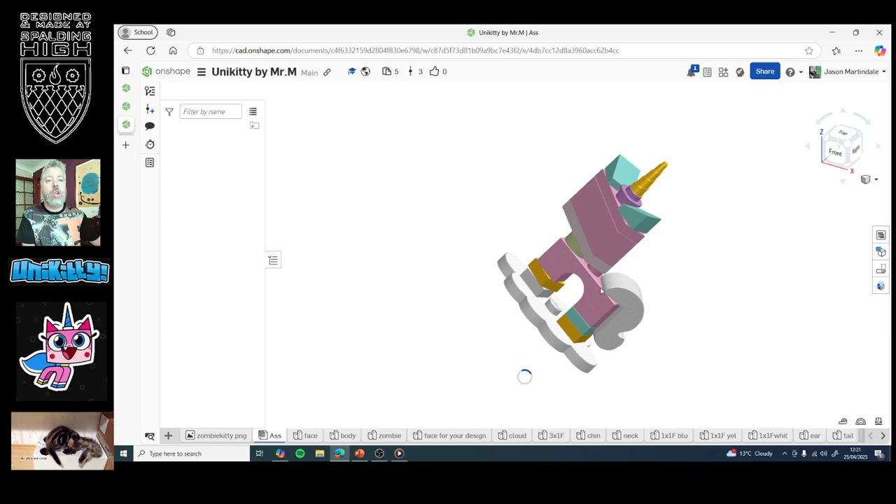But if you go up to the top where you've got these 3 lines and click on copy workspace, you probably won't have to do that bit there, and click on open. Then it'll give you a copy that you can work on, that you can change, that can be your own. You can see this is just taking a moment.

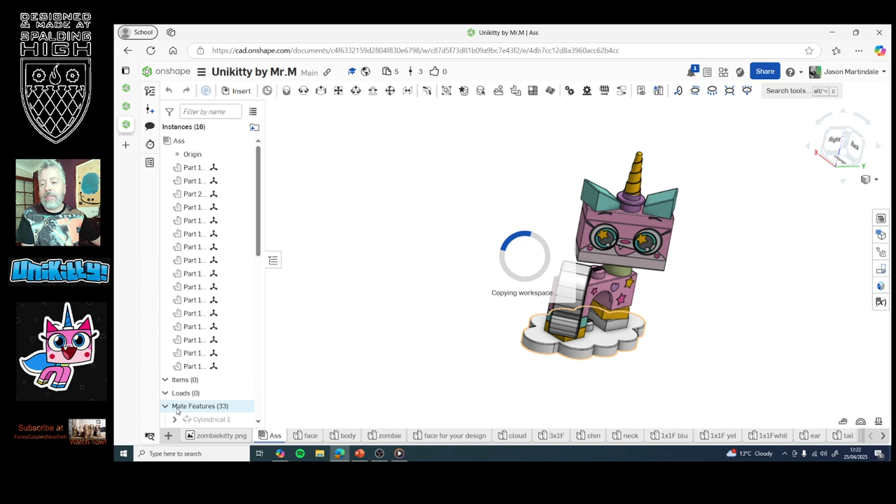You might like to have a look at the pictures of the video of cats down there playing in a box while that's going on.

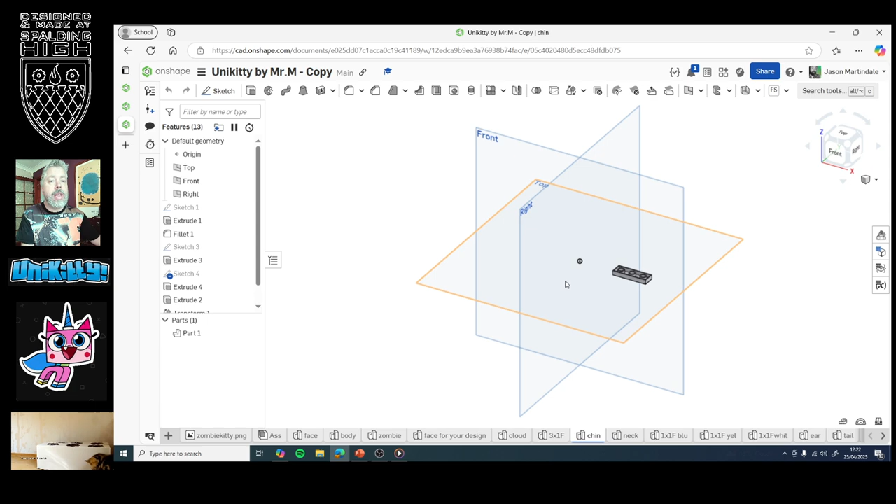Eventually we'll come through to here and we can view this. Along the bottom here you'll see that to do this I actually created all of the individual parts and then joined them together, and that would be, I guess, the next part, how we go about joining those together. What I want you to work on for now is this one that's the face for your design, the brick that would have Unikitty's face on it, and you're going to draw that on there. You might like to start by changing the colour of this.

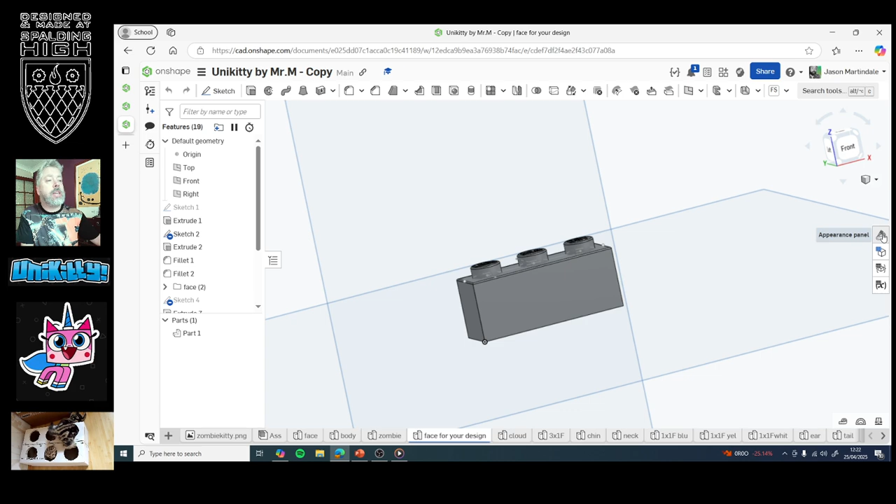Over on the right hand side where we've got the appearance panel, if you open that out and double click on there, you could change it to any other colour to begin with. That would all be a good way of working.

And then as per usual, we'd click on sketch, select the work plane, which is going to be this front work plane, and we would draw the different parts that we want to have on there. So maybe we've got a couple of eyes, and maybe we're going to have like a mouth that is involved. I should just double click to get that line, shouldn't I? Use a spline like that. So that is a sketch on the front.

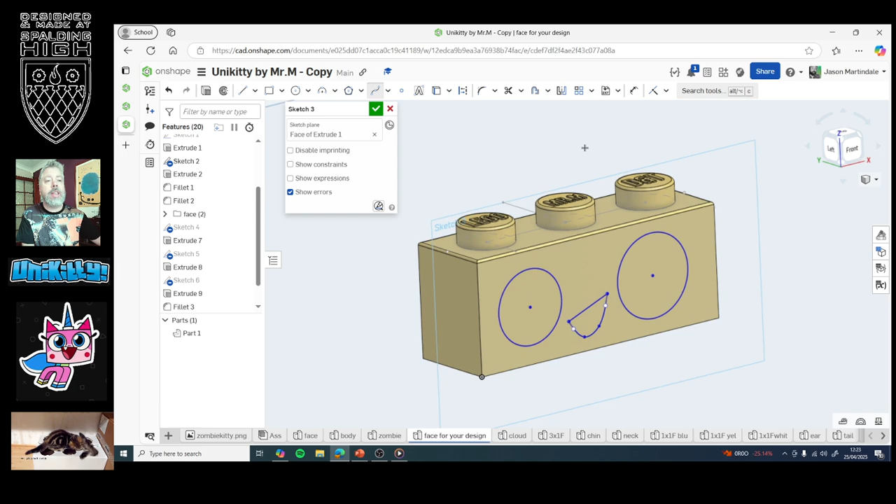Incidentally, if you were doing something that went up to the top of here, so let's say I was going to draw a, don't know what that is up there, just make sure that you do across the top here, complete the sketch so that it is an enclosed perimeter.

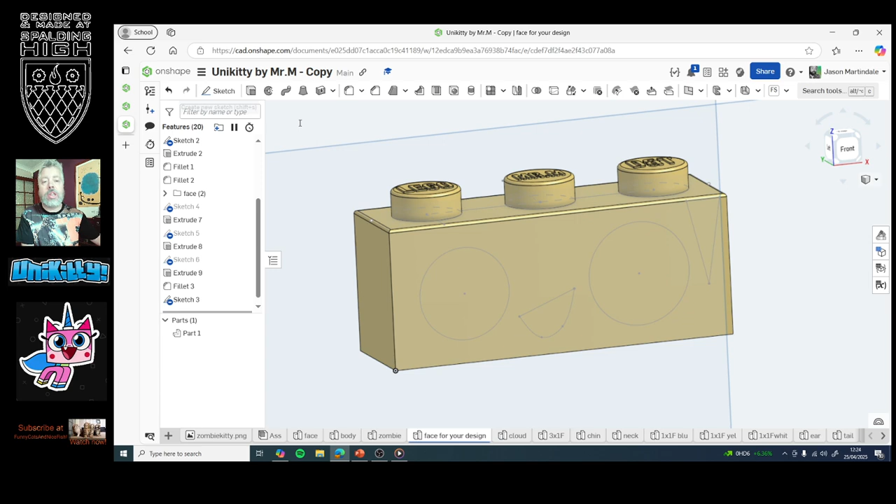What we can do then, in order to be able to make this a different colour, we do need to extrude that. Maybe not out that far, but if we take that into here, like so, it's almost like we've printed onto that. It does mean then that at our appearance panel we can go into add face appearances and select individual parts to be different colours and so on and so forth.

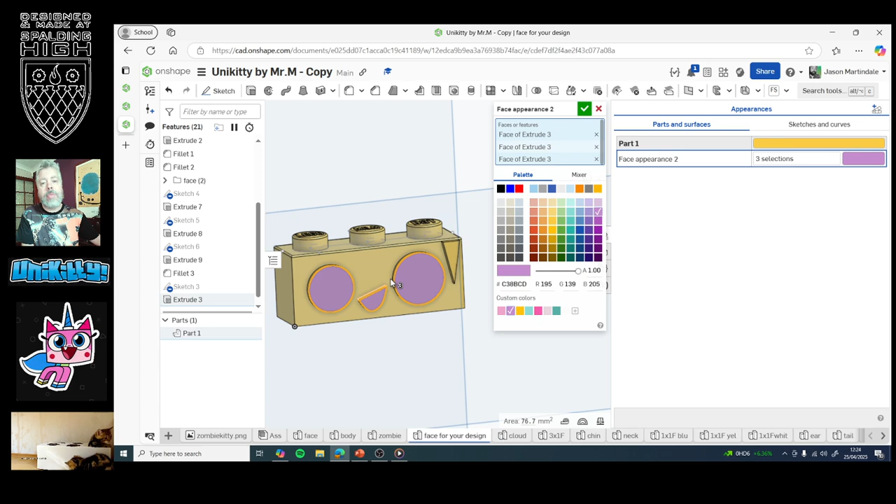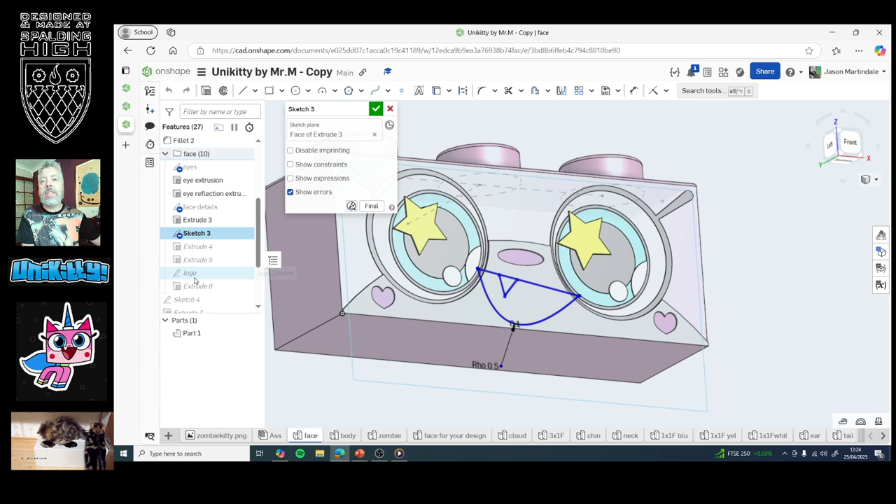To draw something more complex, what I've done, you can see, is I've just drawn quite a lot of sketching going on. So let's have a look - I've grouped them all together in this bit here. So I've got the eyes drawn as a sketch there. I've got the sketch, which is the mouth, and so on, and all of these different extrusions. So that is something that you can spend some time on.

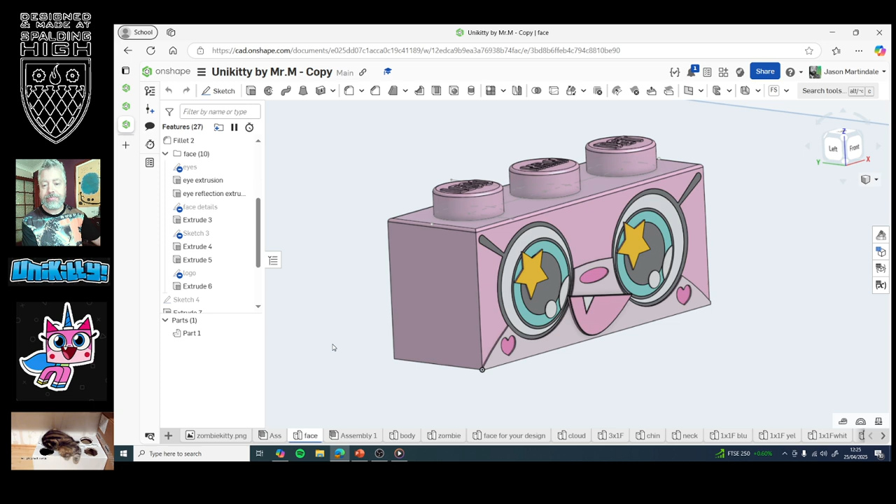Perhaps instead you would prefer to play with my parts and try and work out how you're going to join them together. To do that, we'll click down, insert a new tab down at the bottom here, plus, and we'll create what's called an assembly. If we click on insert, these are the different parts that I've drawn along the bottom here, and we can pick out any of those parts. So there's the face that I've just drawn, and I could take maybe the body and bring that in and put that there.

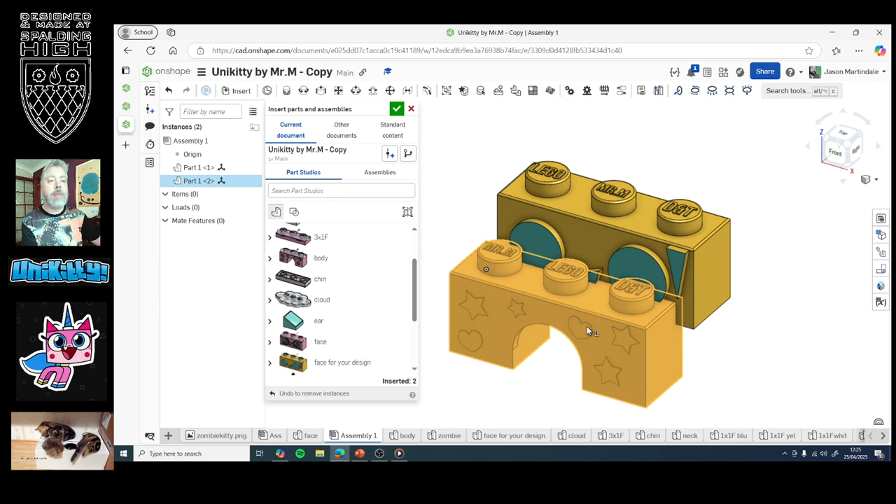For argument's sake, we will also bring in an ear. Just get rid of that up there. Restore - so there we are. So these are my different parts.

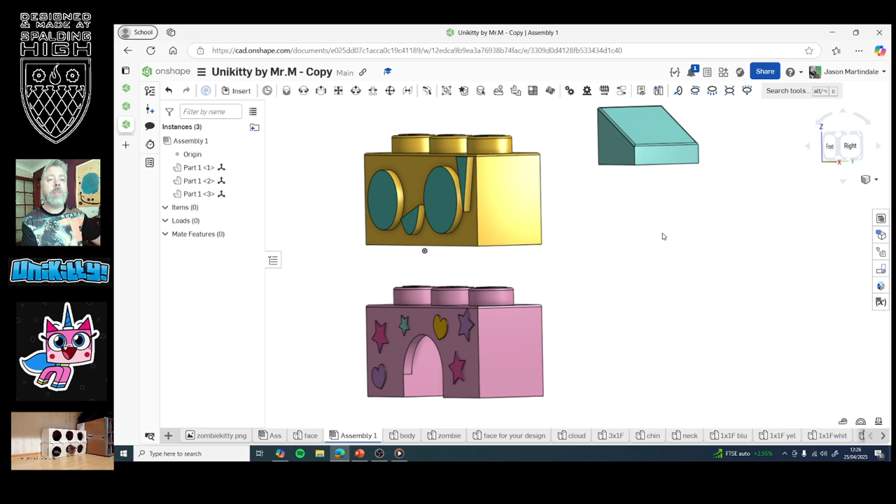Now it is possible just to click on one of these parts and try to move it around using this here. However, it's not very accurate and it's difficult to work because we're in a three-dimensional space. So you think you've got it in the right place, but it turns out to be too far forwards or too sideways and so on.

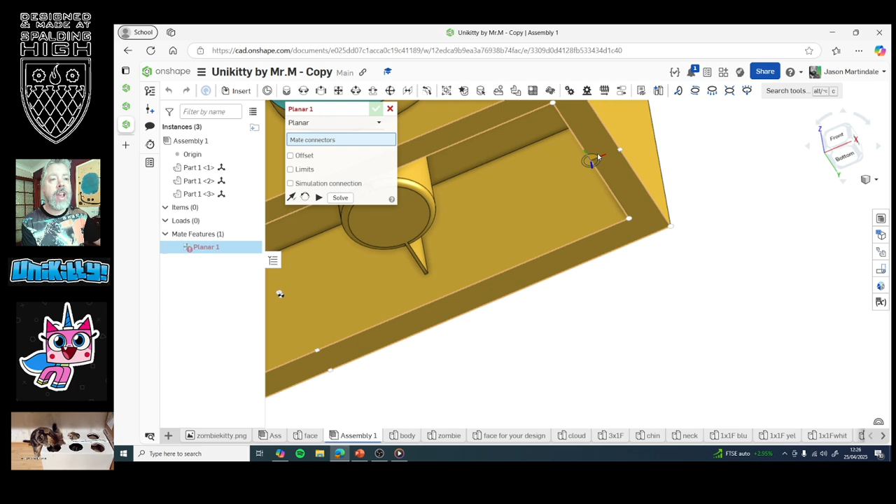What we can do is instead use this mating function up at the top here. If I click planar mate, it's asking me to select my connectors. If I try connecting maybe this face here, so if I click on there and then come out, that's still selected. You can see if I select this face here...

Now what it's done is it hasn't lined it up for me, because this computer's not clever enough to know what Lego is or even what these things are, but it has joined one on top of the other. So I can click tick there.

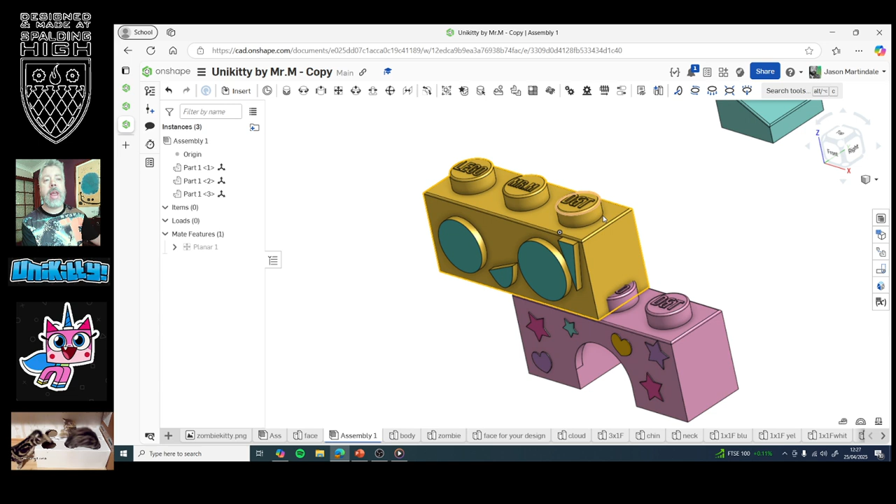And what that means as well now is that if I get rid of the planar function and click on this and try moving this, you can see it'll move that way and it'll move this way. If I try and move it this way, it takes the other one with it because they are in fact joined.

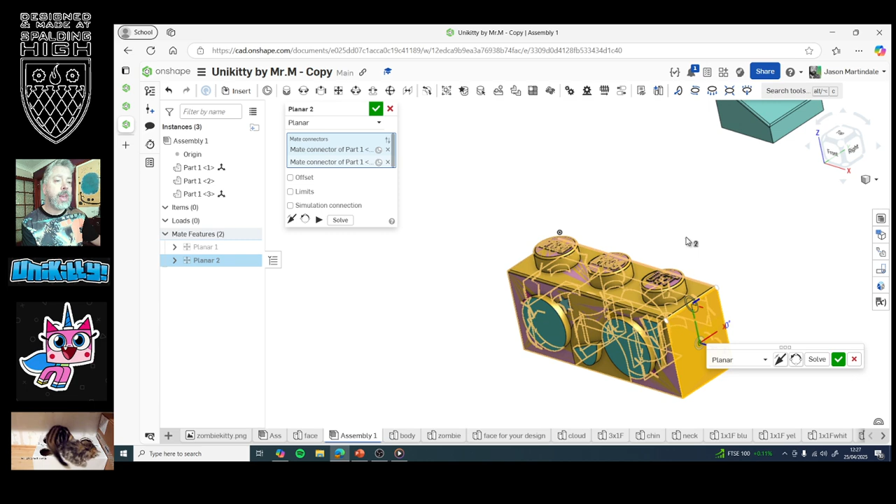So if I go back to planar mate and I select this as a mate connector, and I select this one as a mate connector, you can see - well, in actual fact it seems to have lost the first one. You will need to click on solve down here.

So click on solve and then it's like, okay, well I've worked that out. And it's put it there like that. So I can click tick there. Again, if I get rid of that, we can see now that those are joined, or at least nearly.

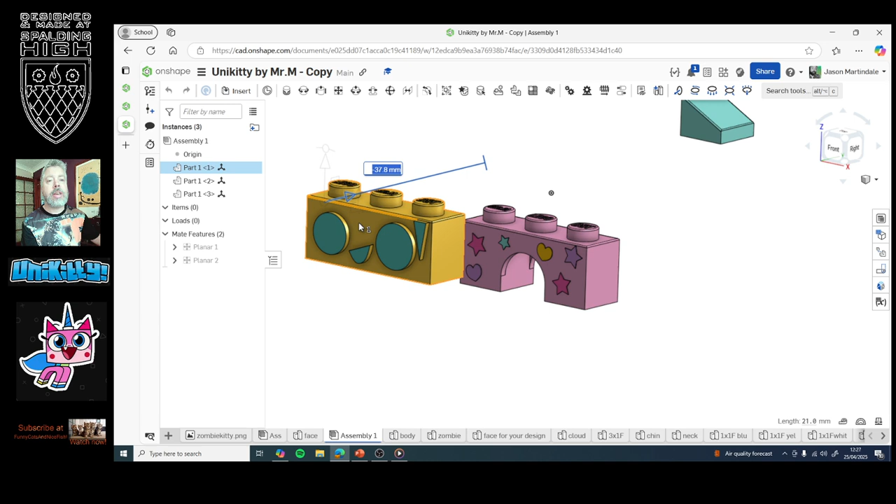You can see if I select this, if I pull this now, it'll pull that way. If I pull this way, it'll go that way. If I pull it this way now, it's still sliding off. So you could mate those together.

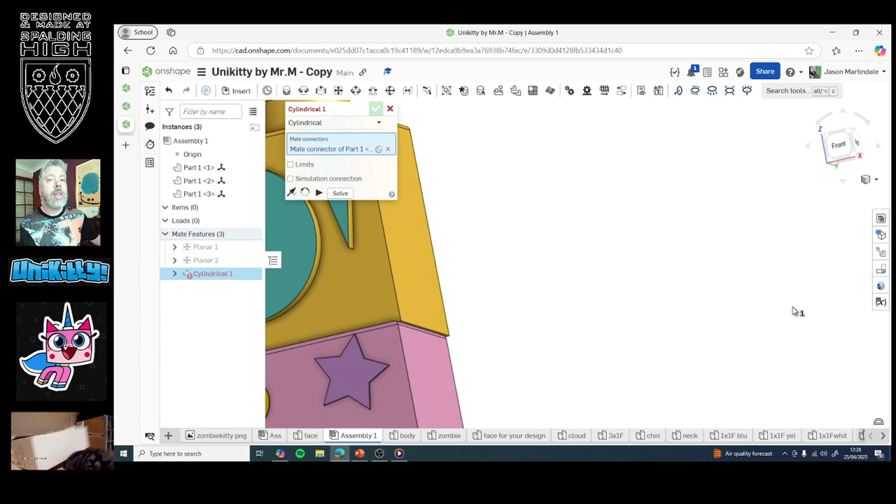Another nice one to use of these mates is the cylindrical mate. You can see the underside of this piece, I've got a cylindrical hole. If I go onto cylindrical mate and I select that, and select the cylinder on there, and come back out and select - see that's still highlighted, the cylinder here - then it's brought it in.

So again, if I get rid of that and I pick this up, I can move it this way. If I try and move it this way or this way, it's joined to that one there.

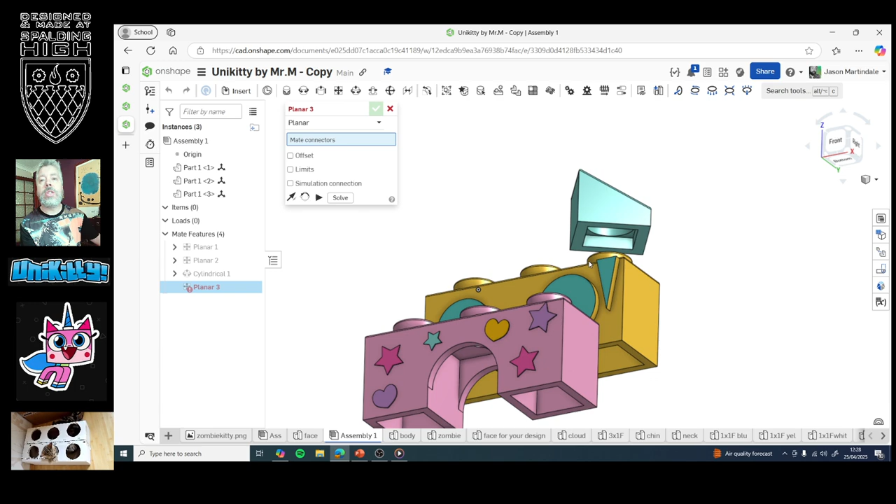What I can do at this point is take this and turn it like this. I can do a planar mate using that to fix it onto there, and again if necessary click solve. And you can see now that when I select this, if I move it like so, it's also good here, but I can slide it around the top there now to be able to create a more complicated Lego object.

Well, I think this is probably the sort of thing that you could get completely lost in for hours and hours and hours, but any time that you spend using Onshape, designing the face or trying to put the different parts together, will ultimately benefit you in design technology in the GCSE course and improve your understanding of three-dimensional space and form, and hopefully it's just a little bit of fun for you as well.